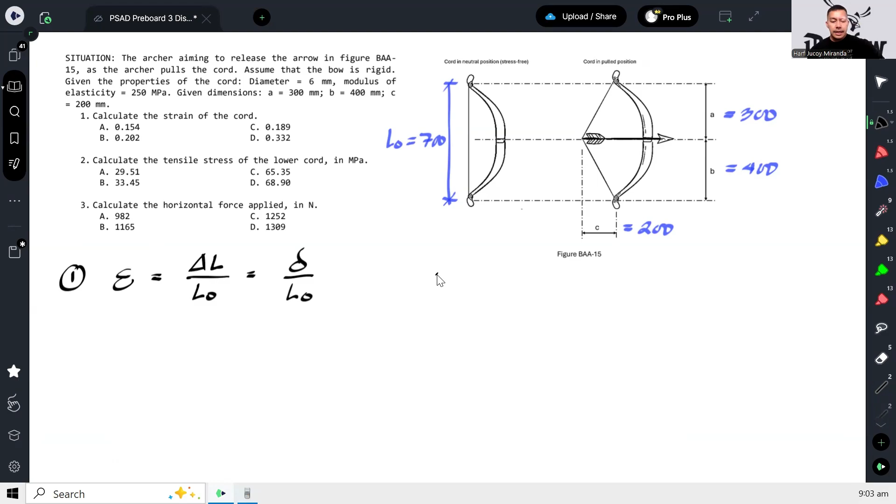So the final length would be, this has a length we'll call L1, and this also has a length, L2. So the final length is just L1 plus L2. How do you solve for those? Well, you can notice that you can create a right triangle where the base is 200 and the height is 400. Same for the one above.

Okay, the base is 200, the height is 300. So we will just use the Pythagorean theorem to calculate each. So we have square root of 200 squared plus 300 squared, plus square root of 200 squared plus 400 squared. So the final length gives us...

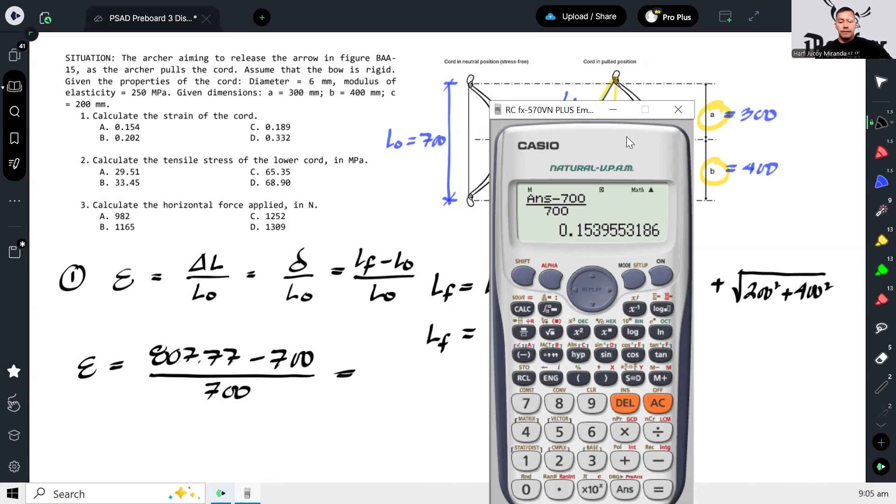807.77. So therefore, the strain we're looking for would be final length minus initial length. Final length is 807.77 minus 700, over 700. And that gives us 0.154. That's our strain.

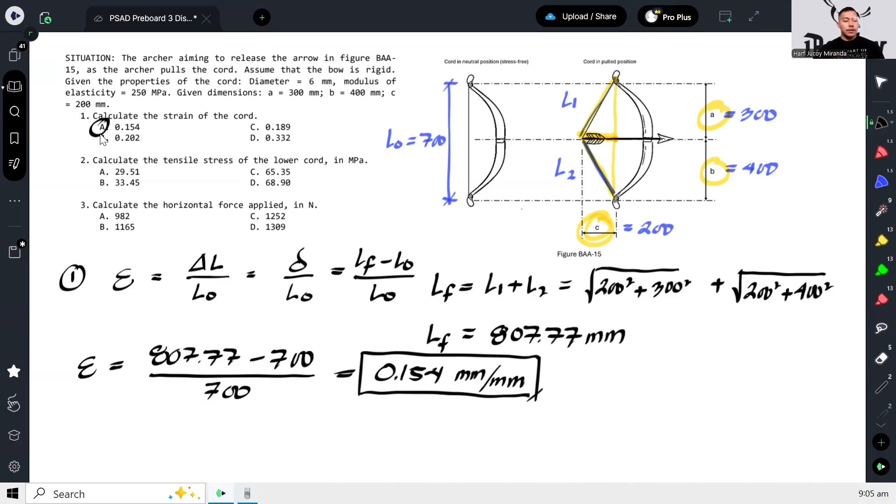Okay, next, calculate the tensile stress of the lower cord. What is tensile stress? That's number 2. Okay, since you pulled this, there's likely tension here, and also tension here. All we have to do is calculate those tensions. But how do we do that? We don't know what force was applied. So now we'll play around with the formulas a bit.

So our formula for axial deformation is PL over AE. Note that P over A here is your stress. So that means you can also rewrite this formula as stress times L over E. From there, we should be able to calculate the stress. So we will just define what L is, since E is given.

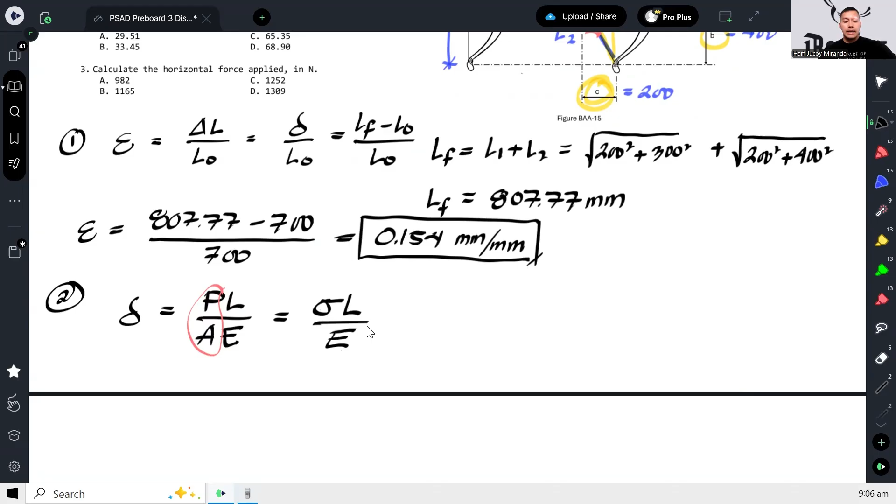Well, the deformation for the lower portion can be calculated as L2 minus the initial length. The initial length of the lower portion is 400. That is square root of 200 squared plus 400 squared, minus 400. So that gives us 47.21.

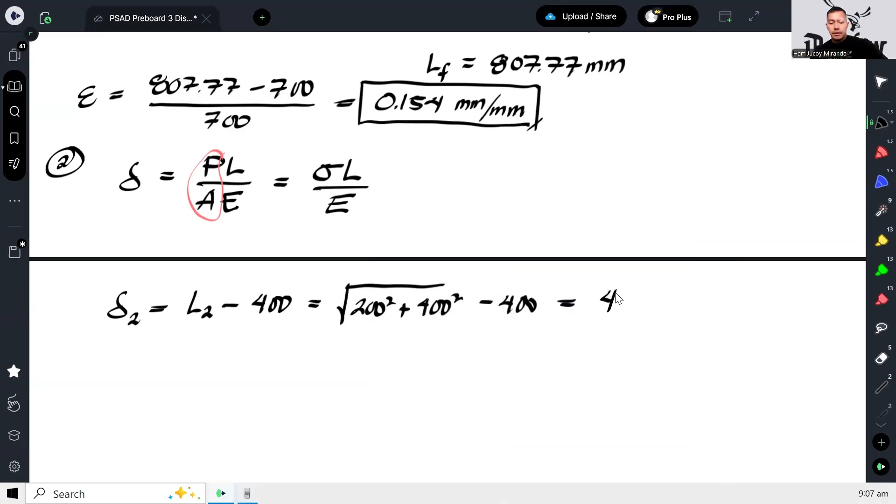And then from there, let's equate that to sigma L over E. So we have 47.21 equals stress at the lower portion, which we'll call sigma 2, times L at the lower portion, 400, over E, which is 250. And from there we can solve for the stress.

So this is in Newton. So if you divide by 1,000, that gives you kilonewton. So 29.51.

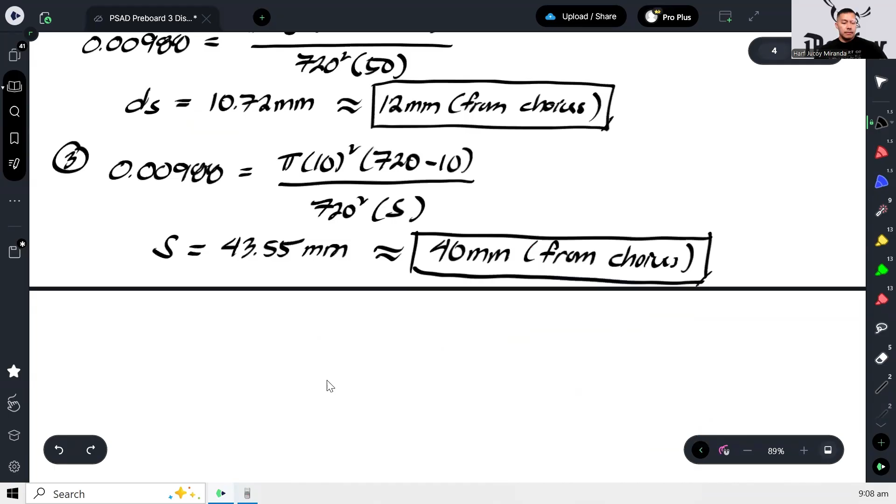Let me go back. This is actually megapascal. What were we... Megapascal na pala ito, guys. So we don't need to multiply by 1,000 anymore. It's just megapascal. So from here, just times 250 over 400. There, 29.51 megapascal lang yan. Okay, and that's our answer for number 2.

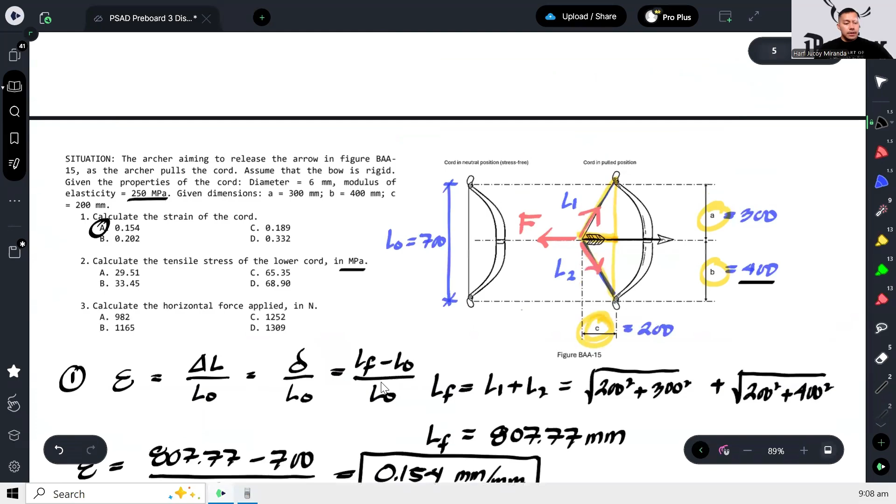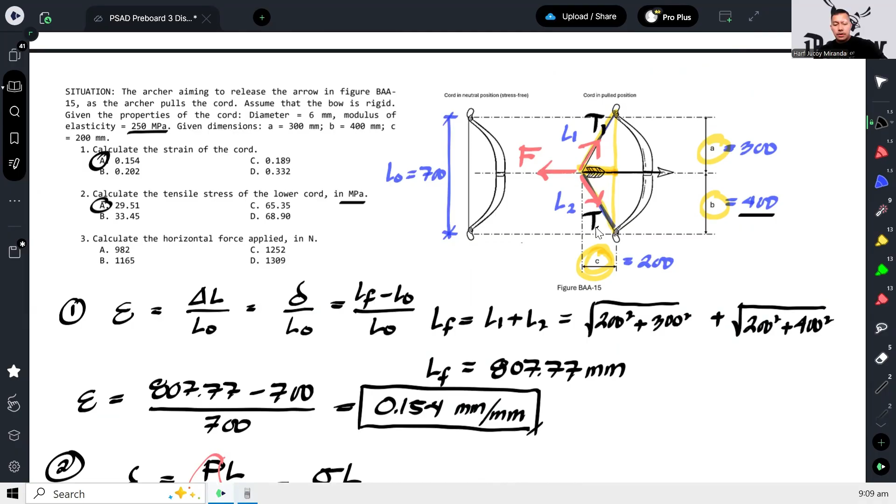And then number 3, calculate the horizontal force applied. So what is the horizontal force applied? To compute the horizontal force, we first need to get the tension here, and the tension here. So what's the tension at the bottom first? We got the stress, and stress equals force over area. In this case, we're given the diameter, the diameter of the cord is 6 mm.

So we can solve for the tension. We have 29.51 equals P2 over pi over 4 times 6 squared. So we can solve for the tension at the lower portion. This is in Newton, so 834.33.

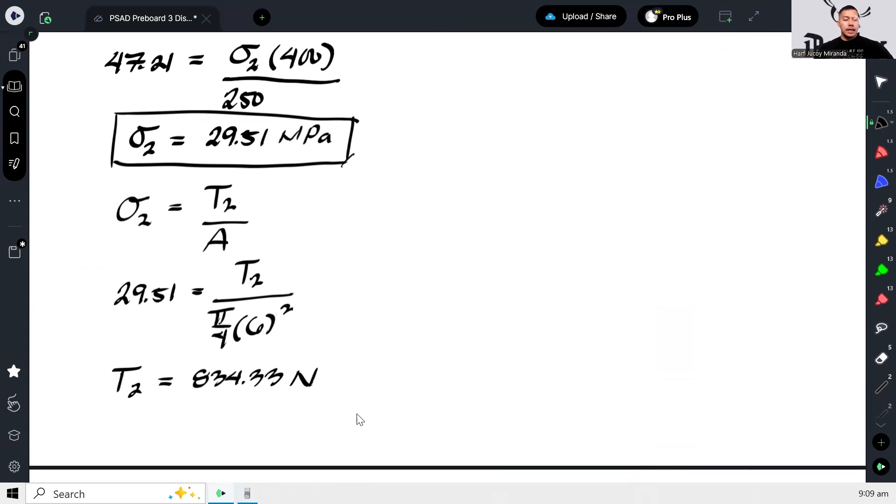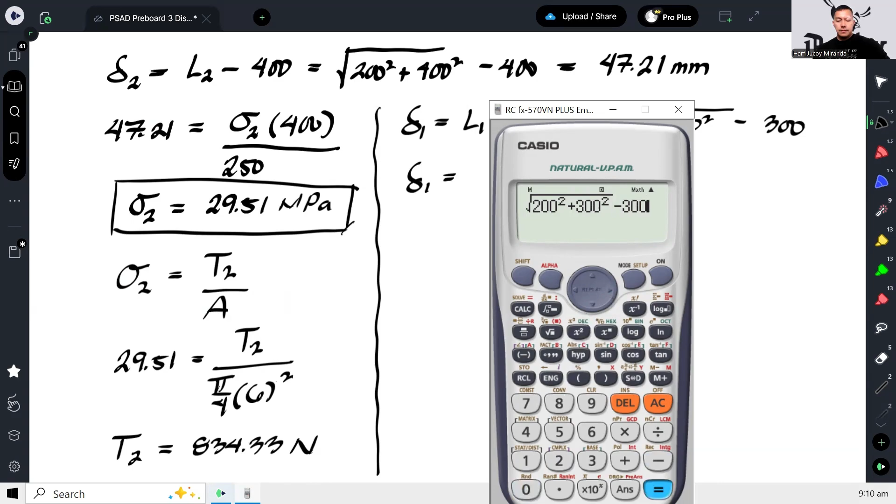Okay, and we also need the tension at the top. For the top, we'll repeat the process. Let's get the deformation at the top. That is L1 minus 300, the initial length of the top. And that is square root of 200 squared plus 300 squared minus 300. So the deformation at the top equals 60.56.

And then let's equate that to sigma L over E to get the stress. But actually, we can go straight to PL over AE since we're not really looking for the stress. So P, which is P1, times L, the initial length at the top, 300, over area, 6 squared, times E. So we can solve for P1.

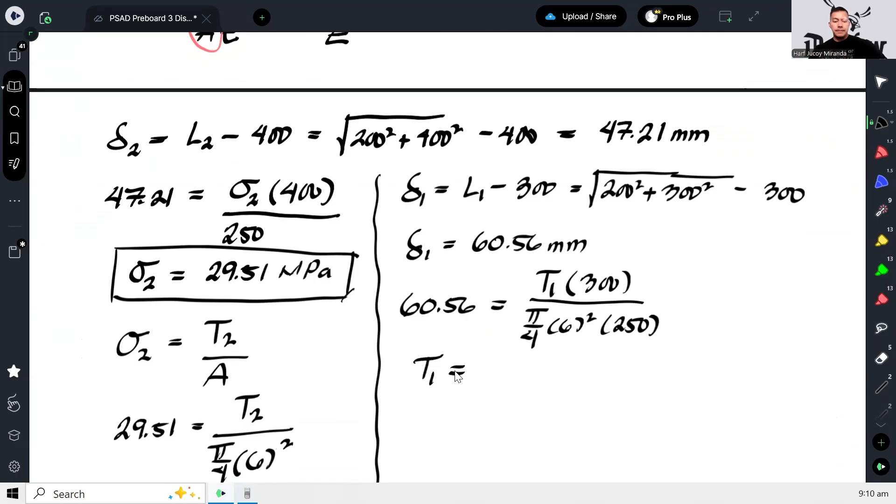That's 1,426.8 Newton. Okay, and from there, we can now analyze this joint.

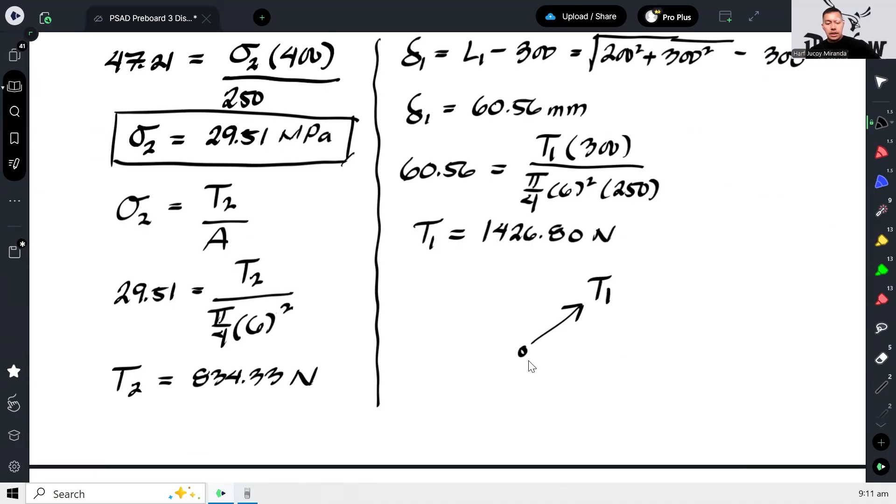So when we analyze there, this is the end point. This is T1, this is T2, this is F. As you can see, a simple summation of forces horizontal will get us the force. The slope here, going back to the figure, is 200 by 300, so 2 by 3, 2 horizontal, 3 vertical. Then square root of 3 squared plus 2 squared gives us square root of 13. This one, the slope is 2 horizontal, 4 vertical, so this is 2 square root of 5.

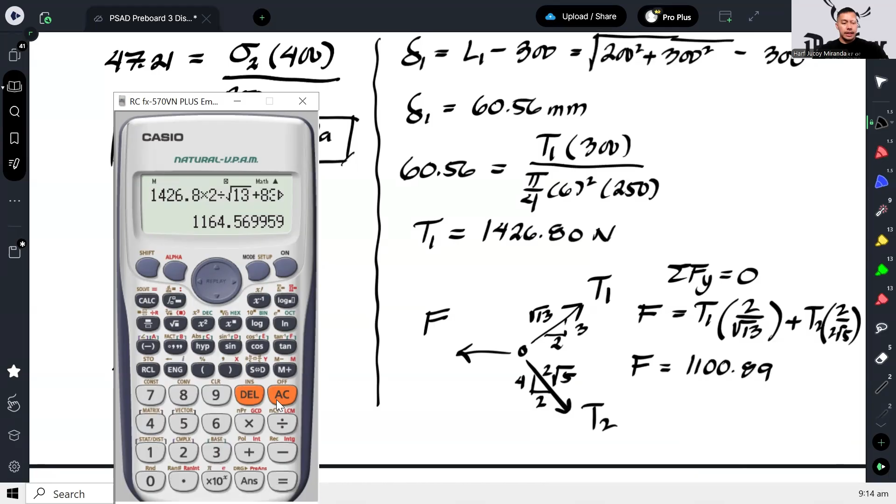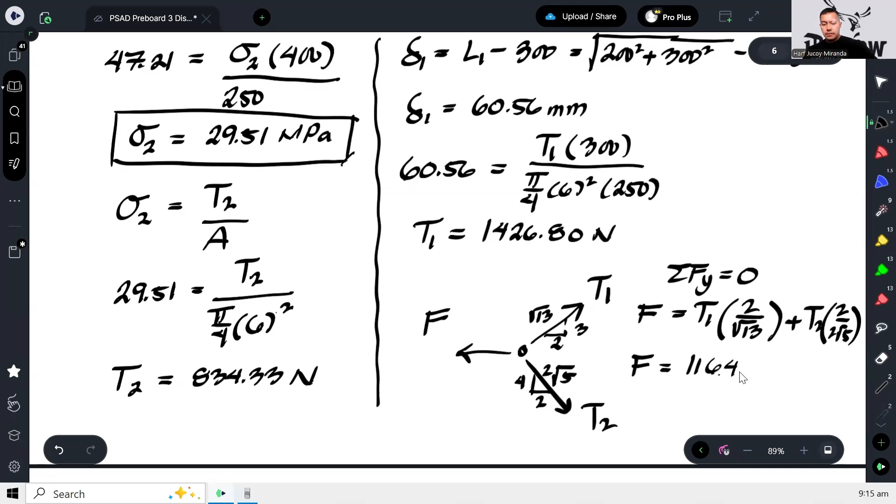So summation of forces horizontal, we have F equals T1 times 2 over square root of 13, plus T2 times 2 over 2 square root of 5, giving us the horizontal force. T1 is 1426.8 — I had them reversed — and T2 is 834.33. So that gives us 1164.57 Newtons. That will be our answer for number 3.

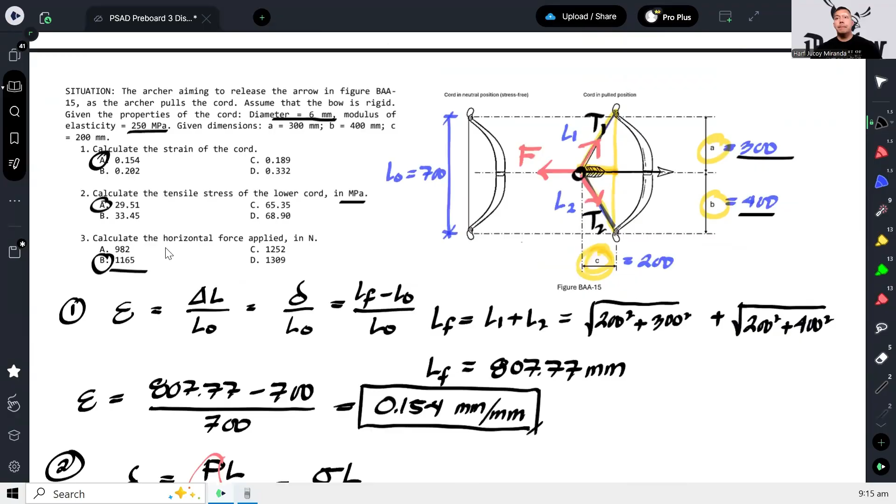So that's how we solve this problem.